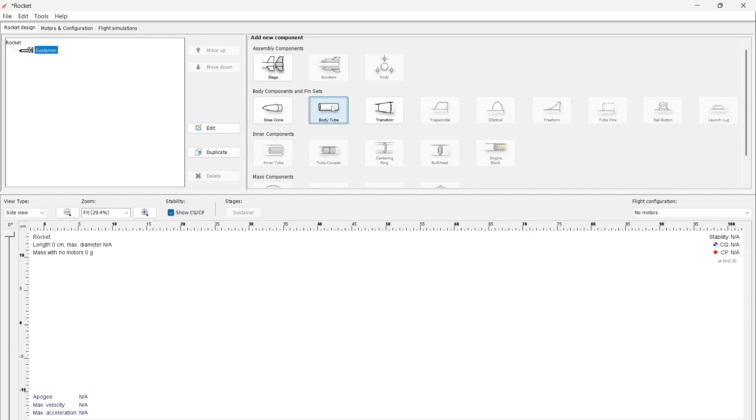Close out of that, and here we can see the settings. We are planning on using cardboard for this. Length, I have an old wrapping paper tube. It's 30 inches long, has an outer diameter of 2 inches, and let's go with an inner diameter of 1.9. Okay, there we have our body tube down here.

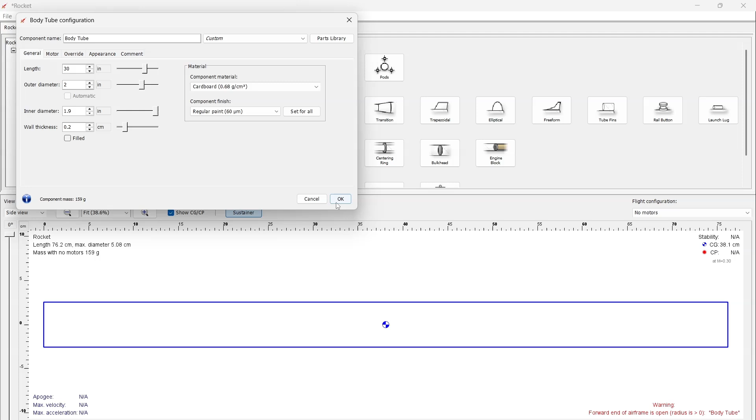Next, let's add the nose cone. Click on the sustainer, nose cone, close. Now we can see we have it in the wrong spot, so we're going to just drag it up over here. Perfect. Let's edit it.

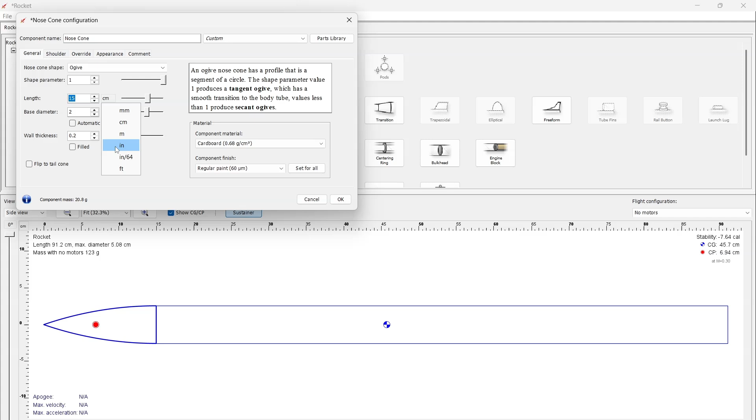Let's edit the base diameter first. Let's go with our 2-inch diameter. Length, let's go with 10 inches. Okay, material, I plan on using styrofoam. Let's do one. Okay, perfect.

And then let's do a conical shape. Noted up here we can see our stability of -9.1. That's quite far off of our desired 1 to 1.5.

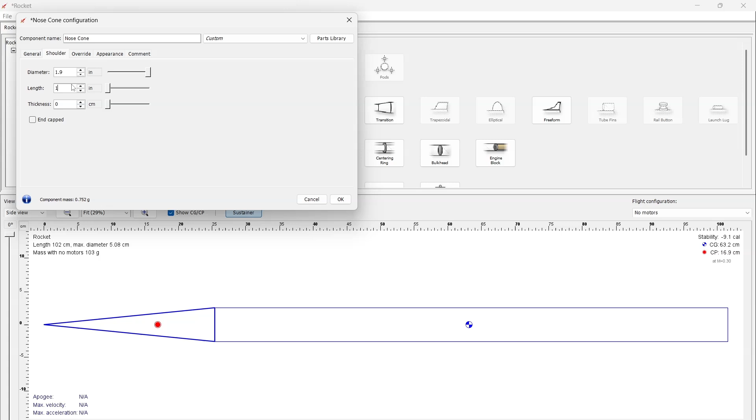Next let's add the shoulder to the nose cone. This will be the inner diameter of the rocket body of 1.9 inches, and then the length, let's go with a length of 1.5 inches. If we hit OK, you can see this as the shoulder. This is what connects it to the body tube and what will separate when the parachute deploys.

Okay, let's go back to the body tube. Let's add the inner tube. This is where the engine will be. We're just going to leave this as is for right now. It should be good. Yeah, we're just going to cancel on that. We'll just place it again and then leave it be. Close. Okay, we're planning on using cardboard.

So now let's select this inner tube. Let's go to motors and configuration. We'll select inner tube, and then we'll add the motor that we are planning on using. For this one, I have a D12 that I picked up from Hobby Lobby. Let's click on that one and hit OK.

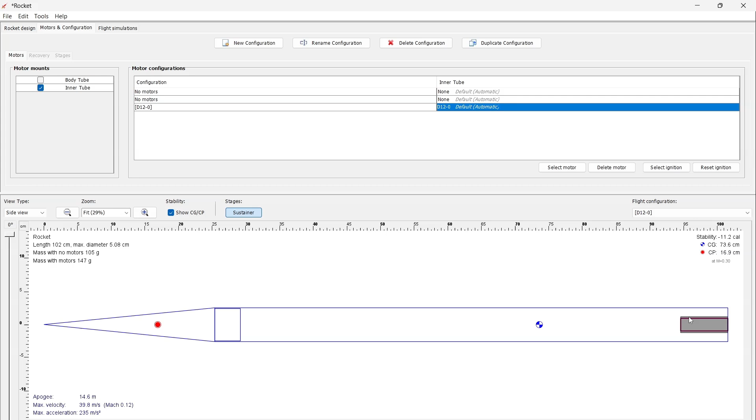So now we can see apogee and stability numbers, and then we can see our inner tube is too small. So let's go back to this inner tube, hit edit. Let's go for an inner diameter in centimeters. I know the outer diameter of that engine is 24 millimeters, so let's go with 2.4 centimeters.

Let's go for an outer diameter - oh, that is not what I want. Okay, let's start with the outer diameter, 2.5, and then we'll bring the inner diameter up to 2.4, which is what we desire. So what I'll do is I have just a cardboard roll, and I'll just cut it down to what we want. Okay, next let's add the centering rings.

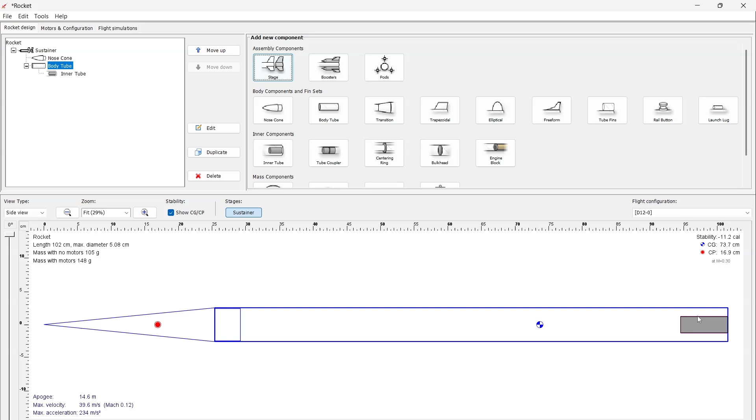These create the engine mount combined with the inner tube, and the centering rings connect the inner tube to the body tube, keeping them in place. Let's close that. Let's just bring it up to about right. Let's go with right there. And then for this material, I'll be using basswood that I picked up, and we're just going to hit OK on that.

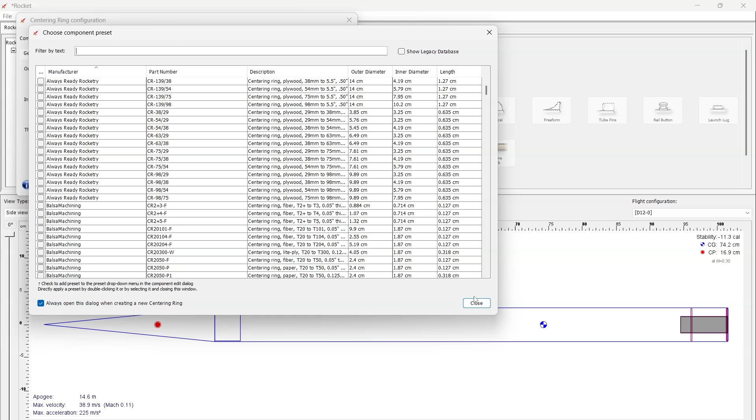Let's throw another centering ring in there. Let's go to basswood. Perfect, and let's throw that also down there. Let's go about - oh, if I can do it - let's go about right there. Oh, no, wrong placement. Perfect.

Okay, next I would like my inner tube to be a little longer, so I'm going to go back to the inner tube, edit, and let's add the length. We'll just bring it up. This one shouldn't matter too much - it'll just be however long my toilet paper roll or paper towel roll will be.

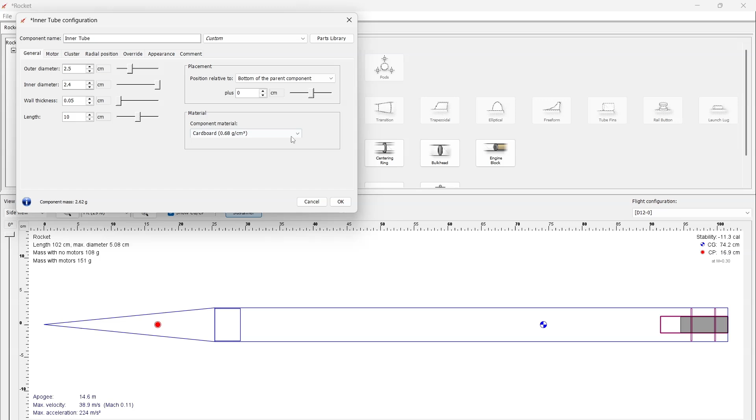Next, let us add the fins. For this, we have a few options: trapezoidal, elliptical, or freeform. I prefer doing freeform just so that I can change it how I want. And then let's select basswood. Okay, I'm just going to leave that as is for right now. Let's add the rest of the parts, and then we can edit the fins to be the shape we want to adjust our stability.

Next, I want to add a bulkhead. This will be basswood, and this will be up against the shoulder of the nose cone, just so that the nose cone experiences less damage - all the force from the pressure is going to just hit this bulkhead.

So this just has to be relative, just to get the calculations in there. I'm going to use basswood for that. Okay, next, let's add an engine block. I'll be using basswood for this as well.

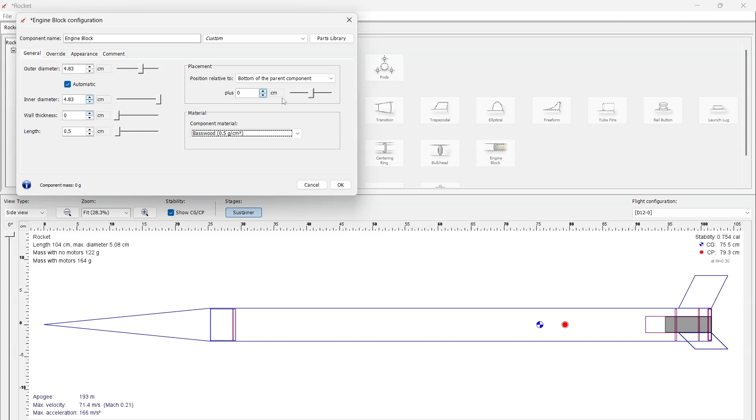Let's go and move that. Oh, I'm going to hit cancel on that because I had the body tube selected. Let's select the inner tube, then hit bulkhead, close.

Let's go to basswood. We have basswood there, and we're just going to move that right above the engine. That'll be good, and that makes sure the engine doesn't go out this way, keeps it in place on this axis. We'll also have a hook down here just to make sure it doesn't fall out the bottom during flight.

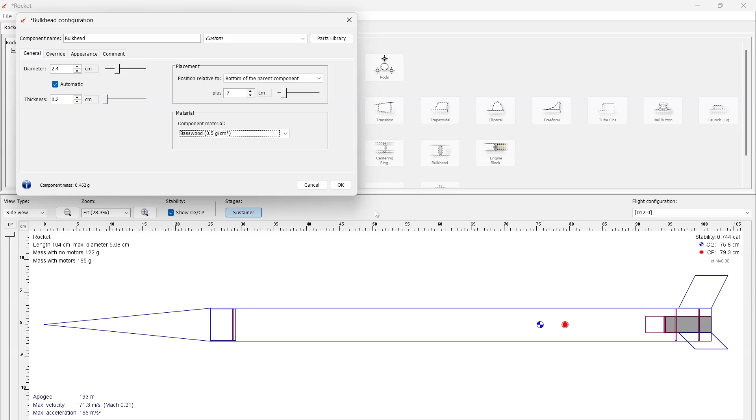Okay, let's add the launch lugs. Those are right here, and we're just going to keep that material. These don't weigh too much, but just want to keep them in mind. Probably try to use a straw or something.

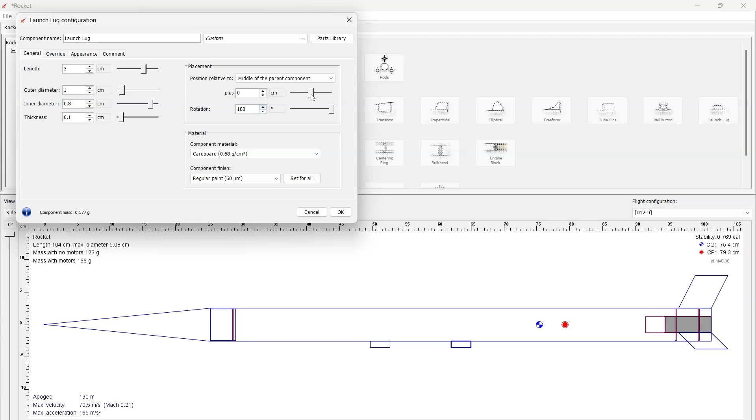Okay, let's add another one to the body tube. Close. Okay, perfect. And we'll go to here to the body tube. Let's add just a shock cord.

We're just going to cancel that. I don't really know what kind of shock cord I'll use. I'm hoping on a rubber band, so I'm just going to add a mass component here, just so that it is considered when we're looking at stability. And I'm going to say it will weigh 6 grams.

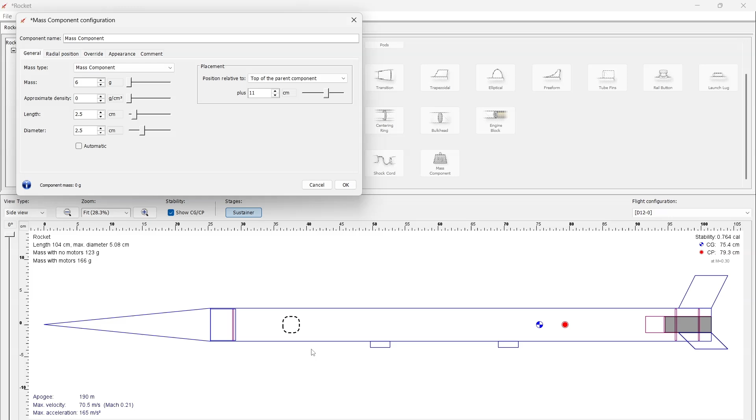And I'll be connecting the nose cone to the body tube so that they stay together when the parachute deploys. Let's also throw a parachute in there. I'm using polyethylene thin, and for inches, we have an 18-inch parachute.

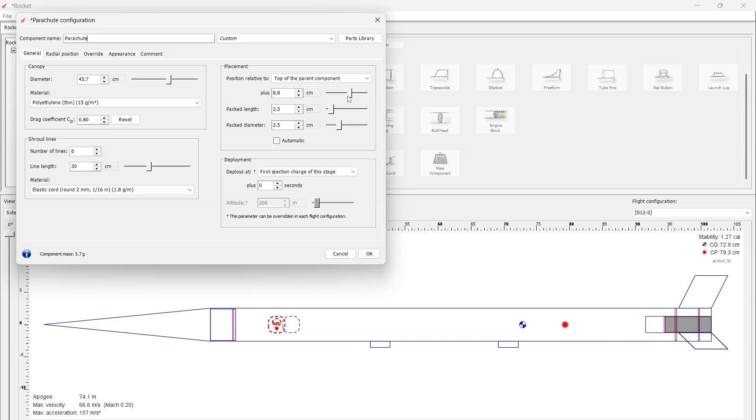Perfect, that looks good. Oh, I forgot to edit where it was. So, placement, and adjust this bar. We're planning on putting it about there. Okay, perfect. If we look at all the components: nose cone, bulkhead, engine mount, engine, body tube, launch lugs.

Let's now look at the fins. Now we can edit these how we want, so let's go over to shape. Let's zoom out so we can see better. And now this is where we can really focus on the stability number and get the fins looking how we'd like, as well as looking at this apogee number in meters.

I personally really like this shape of wings. However, it looks like it might be too stable if I do that. I don't want to risk being overstable, so maybe by pressing on this wire, we can create more points. However, I'm looking to cut this out of basswood, so I do not want a whole bunch of points to measure from. So we're just going to cancel, discard those changes.

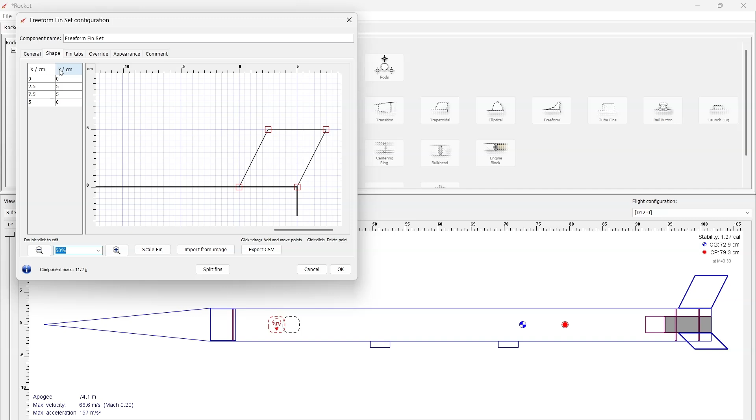Let's edit this. Actually, yep, set to the right material. Okay, let's scale this out to 50%. Notice this is in centimeters, so when you are measuring and cutting wings, this will be important. Fins, not bad. Okay, let's go with -5.

Move that back some. Ooh, I'm kind of liking the shape of those wings. Let's move this up to 10.

Still could use some more stability. Let's try this over to 5. Okay, we are getting there. What could I do? I think I like the look of 4 wings, so I'll go to number of fins and add another one.

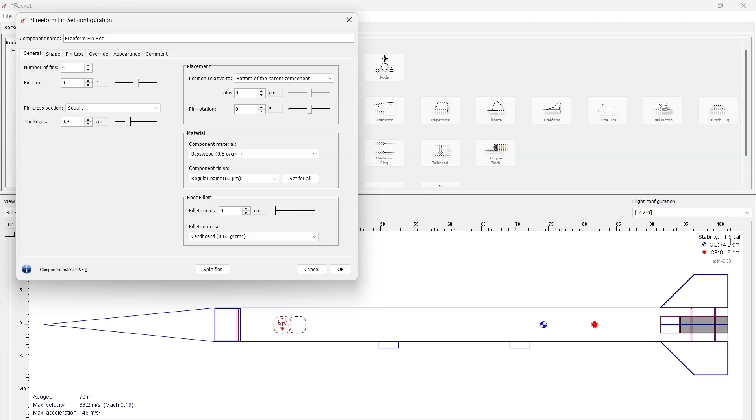Okay, so this is what our rocket's looking like. It appears that our stability is on the higher end. I'd like to just be a little as close to 1 as possible, but a little over it. Maybe like 1.1 or 1.2 would look nice.

So let's go back to shape. I think I would like to move that down. That has increased the stability. Let's just move it down again. That has increased it once again.

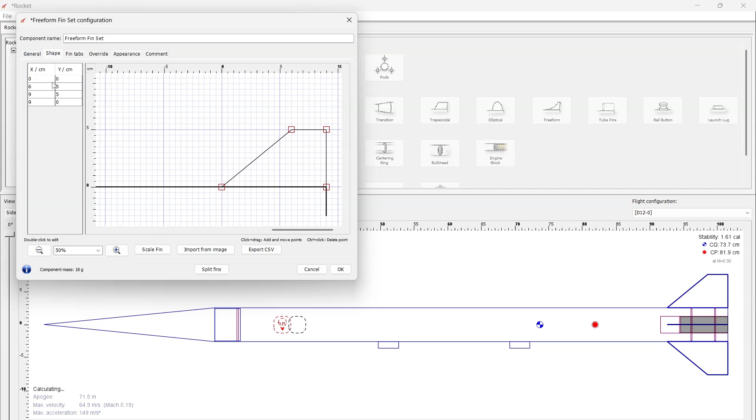Okay, let's move this top component up. That has still made it more stable, so why don't we go backwards? This is nice, so we can kind of just play with this. Also, if you just want to move the lines, it's quite fun.

Okay, let's move this back down to 7. Okay, honestly, I'm liking the look of that. It's a good stability number. So this is what the rocket will look like.

So we can see our apogee is 70 meters. That should be about a little over 200 feet. And now we have the design of our rocket.

So the plan is, when we are building this, we use this as a reference as much as possible and try to follow the steps that we did here to recreate it as much as possible, because if we recreate it perfectly, we can get about the stability and make sure that the rocket itself will fly correctly.

Okay, this is looking good. This will be our rocket. Actually, let me add another mass component for just anything that we might add in the center.

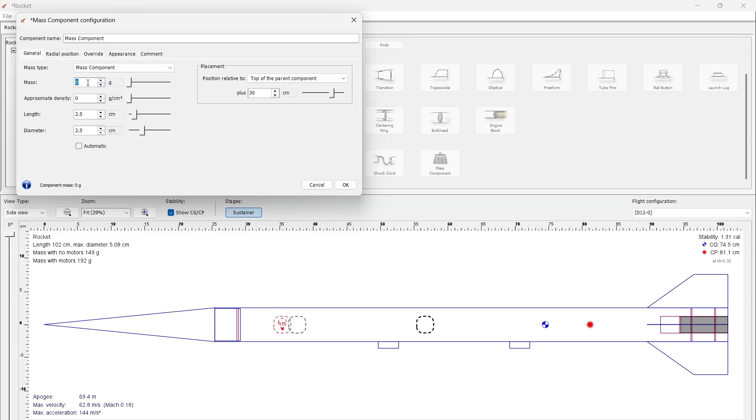Let's add 5 grams for the paper that we are going to put in the center while we do that. Okay, we are leaning on the more stable side. That's okay, between 1 and 1.5, that's looking good.

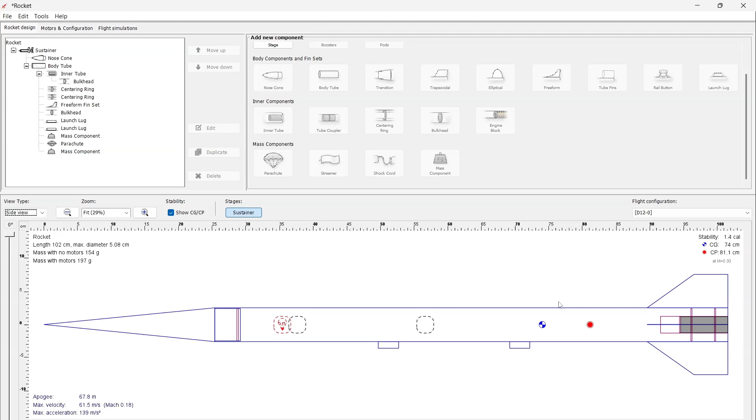So this is going to be the rocket we will be designing. And that should be the video. If you have any questions, please ask them.